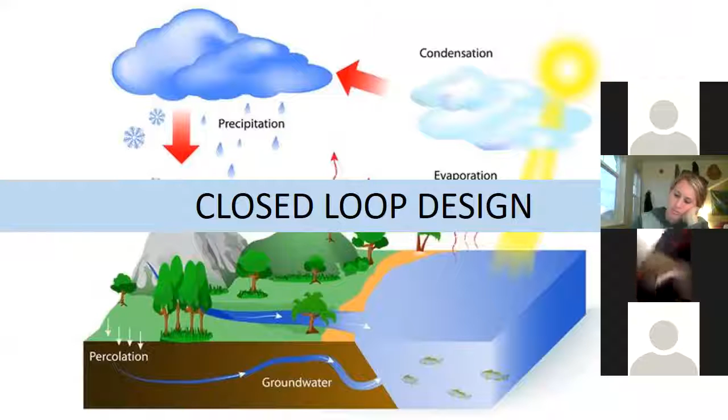Earthship has 6 main principles: build with natural and repurposed material, thermal solar heating and cooling, solar electricity, water harvesting, contained sewage treatment, and food production. I'm going to go through all of these so you can see how they come together, couching it within sustainable architecture principles to show how the Earthship is the epitome of sustainable architecture.

I'm also making the assumption that everybody knows what an Earthship is and who Mike Reynolds is, so I don't have to go into all that detail. I'm jumping right in. If you don't, definitely do some research right now as we're talking to connect yourself with it.

So the first principle: building with natural and repurposed materials. Repurposing materials is a really strong aspect of sustainable architecture. So we have this image of a quilt. Everybody's seen a quilt, right? The quilt is the perfect example of repurposing materials, because historically the quilt was a piece of jacket,

a piece of sweater, a shirt, elements that contained a memory, an element of your culture, your family. You cut those pieces out and put the quilt together, repurposing them because you weren't using them any longer, so you can now keep yourself warm, or from an architecture standpoint, put it over the windows to keep out drafts.

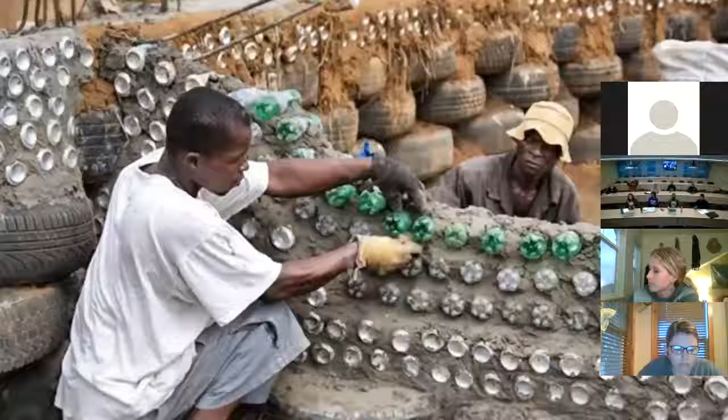And so it looks like this, where you have people that are packing bottles in between, and you have tires in the back that they pack with dirt in order to form the wall. And then you also are repurposing materials on the interior of the space. And so the repurposing of materials and using local materials, you have adobe wall floors, and the material within the doors will be repurposed wood, or depending on how that Earthship is being created, they may actually find an old door and repurpose it.

But the other thing that's really beautiful about this is, so you're getting repurposed glass all through here that's been cut and has been put into this wall to create something very similar to stained glass. It's just this old glass that's been repurposed and put into the wall, and the colors that are in the glass are now creating these really beautiful experiences inside that space.

So the next thing we'll look at is the thermal solar heating and cooling. And first thing we'll look at is the thermal mass. That's a passive system. There are passive systems and active systems. Passive systems within architecture are those systems that you don't have to do anything. It's going to operate, and you'll see what I mean by that. And then you have active systems. Those are mechanical systems. They're systems that you have to provide some sort of energy in order for it to operate and to do whatever its purpose is.

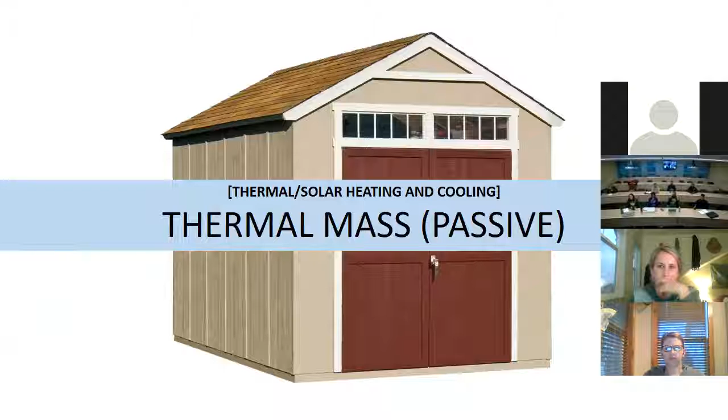And so thermal mass, I have an image of, what's this? Shed. It's a shed. This is a shed, it's storage. We store things in this. So what you want to think about when you think about thermal mass, it's a storage. It's an enclosure that's containing its mass, and it's containing the thermal properties. Sun is beating in there. So in essence, you're storing sun inside of a thermal mass. So why is that important?

So thermal mass is a wall, or it's an element that has thickness to it. And within a normal day, if you don't have a thermal mass, you're going to get a lot of fluctuations, peaks and valleys. As the temperature outside changes, the temperature inside your space is also going to go up and down as a result of the fact that you don't have a thermal mass.

Now you can insulate that wall as well, but the thermal mass also assists you with reducing the fluctuation of temperature. And that's what you see right here. Although there are peaks and valleys, they're nowhere near the peaks and valleys that you get here. It becomes a pretty consistent temperature throughout the day because of that thermal mass.

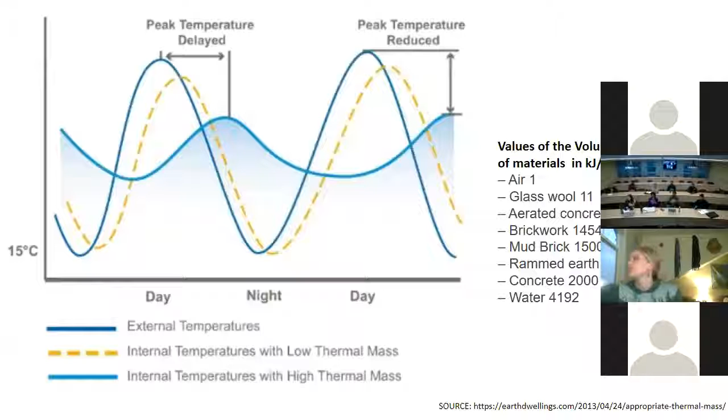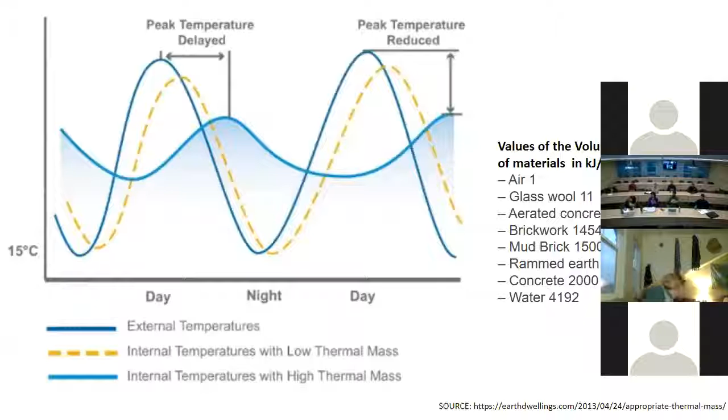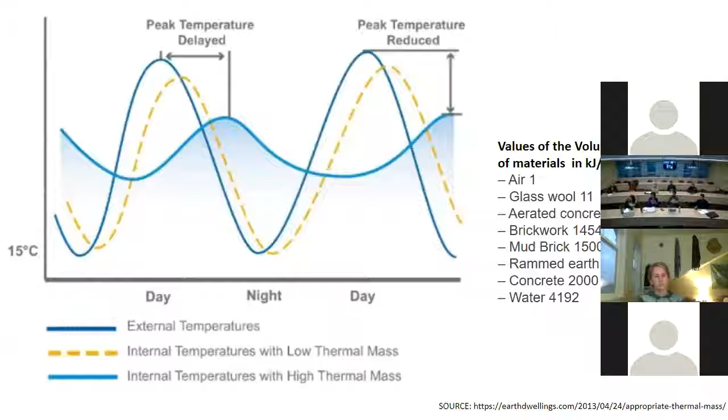So by having a thermal mass, you're able to contain a lot of heat within this enclosure. And the value of that is that as the temperature swings, that heat eventually is given off. So if the thermal mass had heat that was up to 80 degrees, then as the temperature drops below 80 degrees, that heat starts to dissipate and come on out because heat wants to go to the lowest temperature.

And this is what that thermal mass looks like. And so they take tires and they pound the tires and they fill them up with dirt, and that's how they begin to form the walls in order to create the earthship.

All right, so the next thing you want to look at, does anybody know what this is an image of? Sunbathing. Intelligence, I love it. So sunbathing. Trick question. I was gonna say Gidget.

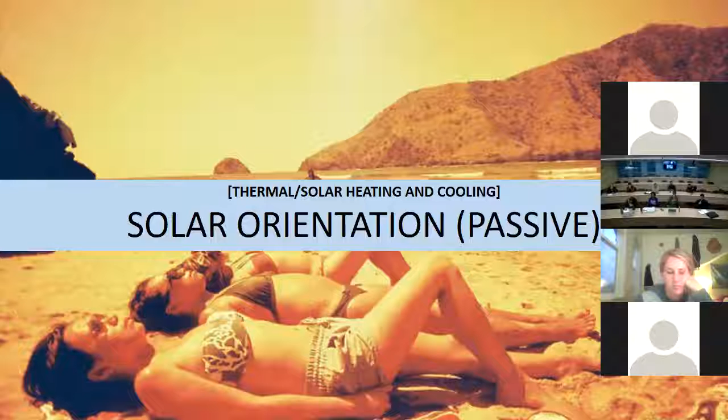So thermal solar heating and cooling. You know, when you sunbathe, you're not trying to get in the shade, are you? Hopefully not. You're not going to get a really good tan, right? So when you're sunbathing, you're looking for the optimal location in order to take advantage of all that radiation that's coming from the sun. Well, that's the same concept when you're dealing with solar orientation.

And so by having your southern orientation with a lot of windows, you're able to get all of that heat gain beaming into that space. And so if you have a thermal mass, I don't have it in this presentation, but it's called a Trombe wall, or if you have an earthen wall that also acts as a thermal mass, that sun will beam into the building and it will heat up that floor or heat up that Trombe wall, and it will allow that temperature to dissipate as the temperature starts to swing.

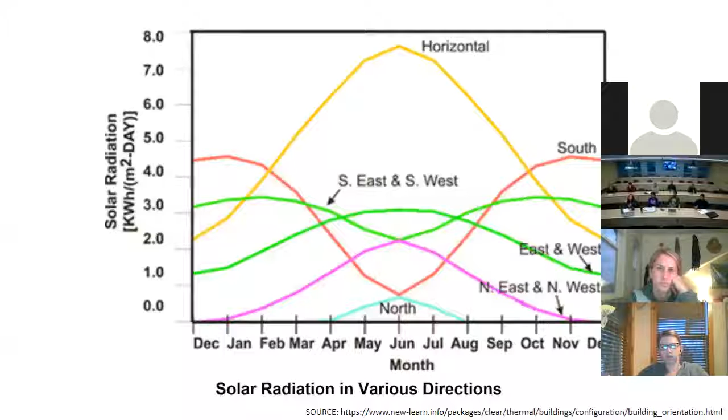And so just by orienting your windows, you can see if I orient my windows due south, I get a lot more solar radiation throughout the day than if I have them southeast, southwest, or within the north. North, you get no solar exposure. So there is no solar radiation. You're just getting ambient light that's coming in. It's actually heat lost rather than heat gain. Yes? Sorry, is horizontal like a skylight? It's just saying that it's flat. Oh.

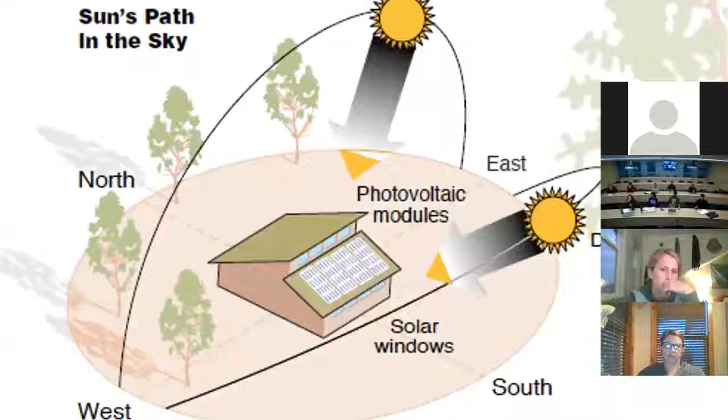The other active system that they have is a cooling system that I thought was really awesome. This was something I didn't see in the literature and in the things that I read about. So it was great when you go and they're like, if you want to keep it cool, open up the cooling tube. Oh man, this is great. Air conditioning, I don't have to plug in.

So they have a cooling tube right here that is the same concept, that if it's warm air out here, warm air and cool air, they want to replace each other. And so by opening it, you're able to get this transfer of cool air into the space to keep the space cool as the night goes on.

And you can see here, you have your summer sun that beats down inside the space. They have a greenhouse. We'll talk about that in a little while. And if this floor was an earthen floor, it would also heat up and it would work as that Trombe wall. So I have a question.

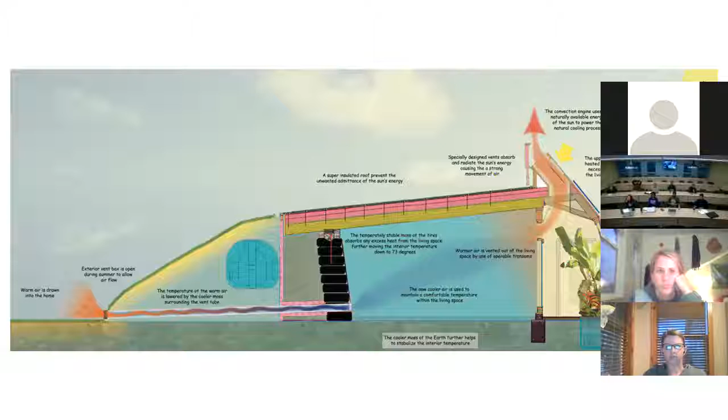That backside, are they built up that way? This here? Yeah, so you actually move the dirt into that mound? Yes. Okay, so it's not like built into a hillside. So this is actually dirt, and I'm gonna talk about this in a little while. It's an earthen berm, and they put this on the north side of the wall so that you're not getting any heat loss. Gotcha. So you have all this earth right here that's just preventing any kind of heat loss that would happen.

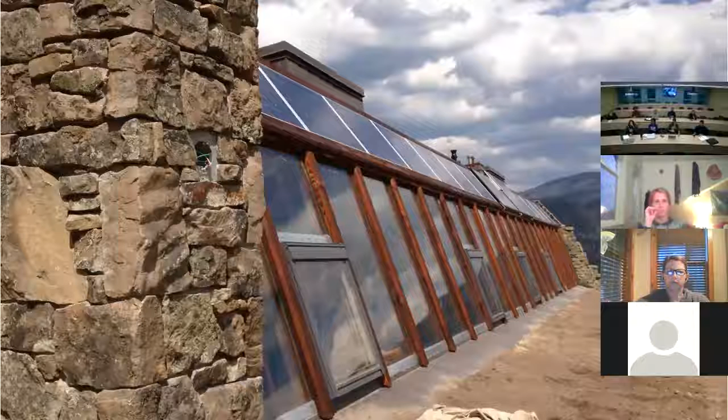And so this is the primary design that you'll see with all Earthships, if they're done the way they're supposed to be done: the southern exposure, that southern wall, you have all the glazing and you have your solar panels, and we'll talk about renewables in a little while. You have the southern exposure with all of the windows here, and so you're capturing all of that heat gain into that space. And I'll tell you in a little while why that's important, outside of the fact that you're able to capture all of that heat in order to keep the space up.

Not ready. So what's the first thing that we say? We look out the window, we see there's snow outside. What do we have to do? Layer up. I need to put a jacket on. I need to make sure that I am insulated, because if I don't, I have a couple of problems when I walk outside in that snow.

And so the way that you measure how well your insulation is, is based off of what's called R value. The R value is the measure of thermal resistance used in the building and construction industry, and it talks about how you're able to resist heat flow. It's measured by R8 to R32, and this is the amount of heat flow reduction. So an R8 wall will give you 90% heat reduction. An R32 will give you 97% reduction.

So simply, it just means that the higher the R value, the greater the heat reduction. The ability for heat to pass through is reduced the higher your R value is. And energy efficiency goes up as well, because if you're heating that space on the inside, you're not losing that heat due to transfer.

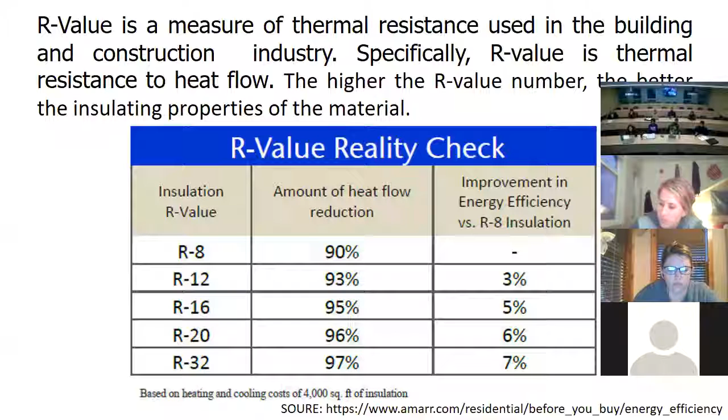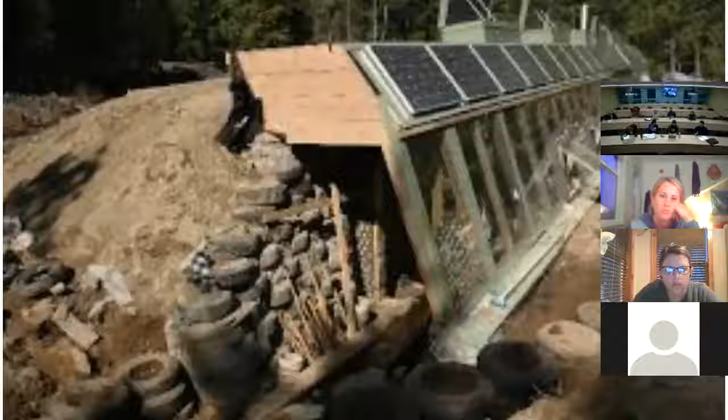And this is that earthen berm. So you were asking the question about the berm. As they build the wall up, they pile the dirt on the backside. So keep building, and then the dirt is built on top of that, and it seals off to prevent the heat loss on that north side, because again, no sun is going to be on the north side. This is actually the front of the house, and it's that much buried. Everything behind that is buried. Yes. So this is the front of the house, and everything else is on the back side.

It also depends on the design of the Earthship, but this is the basic organizing principle: the south side of it will be full glass exposure to the southern sun. Then you're entering from the east and west, and then on the north side, you're going to have an earthen berm in order to resist heat loss.

All right. So the other principle is solar and wind electricity. Wind is not in every single one. Solar is the primary one that you'll find with Earthships. But renewable energy is an active system. It's an active system because it's a mechanically operating system. You have to have inverters. You have to have things in place in order to make it operate.

So it's a little bit different than passive systems, because with passive systems you don't have to do anything. It's going to operate. You're just getting yourself aligned with it. Whereas an active system, you have to put it in place. And so why is renewable energy important? Or is it? Because we're past peak oil. Fossil fuels become a problem.

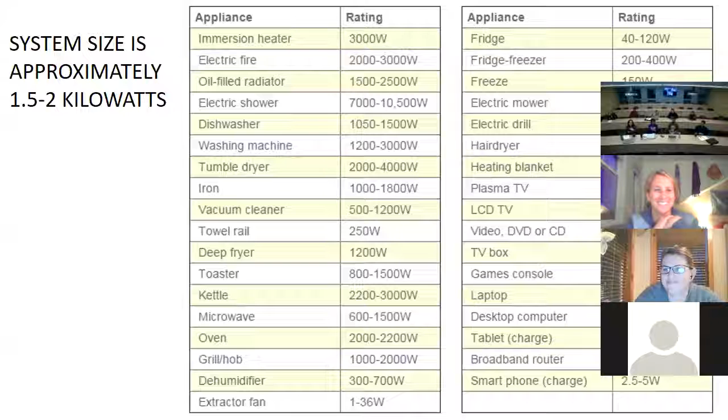You got something on the screen. Oh. You have a comment on the screen? No, I didn't say anything. Is somebody tracking comments, by the way? Yeah.

All right. So let's say while you're doing that, you get a call from your friend. Hey, let's go out, have some fun downtown. So you say I have to iron my clothes because they're wrinkled. So I pull out my iron, and I'm at 1,800 watts maximum, and I forgot to turn off my CD player and my laptop. So I'm getting up to the 1.5 to 2 kilowatts. And if they might come by my house afterwards, let me vacuum. Oh man, I just pushed us over. So we've just shut down our system.

So that's what's really powerful about it. The experience I had being in there is that you become very conscious of the system you're using. You're not just saying electricity is going to be here and I'm just going to flick a light switch on or plug in, which we love to do. You become conscious of your water usage and your electrical usage to make sure you don't exhaust it.

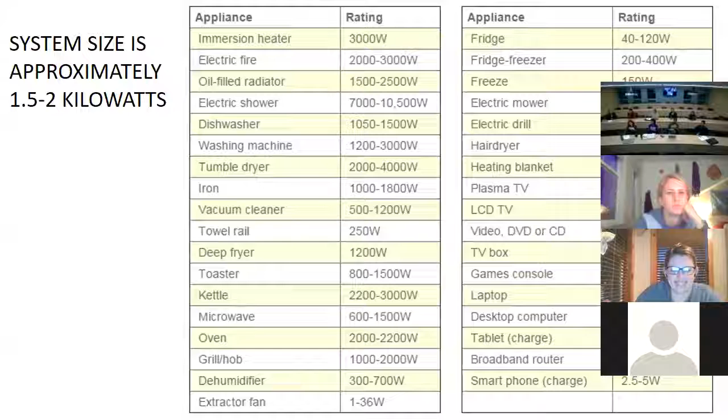It's like the Earthship office we visited. Exactly. They had 3 days of clouds and the Earthship office was running off a generator. The office has to stay operational. The guests, we got treated like royalty. Oh yeah, we did. But the office, they're ironing like crazy, like can we exhaust this system?

And so you see solar as one of the alternative energy sources, and you also have wind. And this was a wind turbine that Mike Reynolds designed. And so wind and solar come together in order to produce the energy that you're going to need generated, and then it's used within the space, that building on the last where we gave our talk. Yes.

And so the array of solar cells that you have dictates how much energy you're going to be able to generate in order to operate as many appliances as efficient. Energy efficiency is something that's also extremely important. So as we talked about the thermal value of that space, by increasing your energy efficiency within the building, you also decrease the amount of renewable energy that you're going to need.

So that's always the very first thing that you do when it comes to sustainable architecture, is that you figure out how to make my building as energy efficient as possible. Because logic just then says that I don't have to use as much renewable energy in order to do that.

So how many of us remember standing outside as a kid, drinking that rain until our parents told us it was polluted, and then they tell us how they used to do it when they were kids. So rainwater capture. Rainwater capture is one of the other aspects. So water harvesting is another component that you find within the Earthship. Let's look at how much water do we use as a body of people.

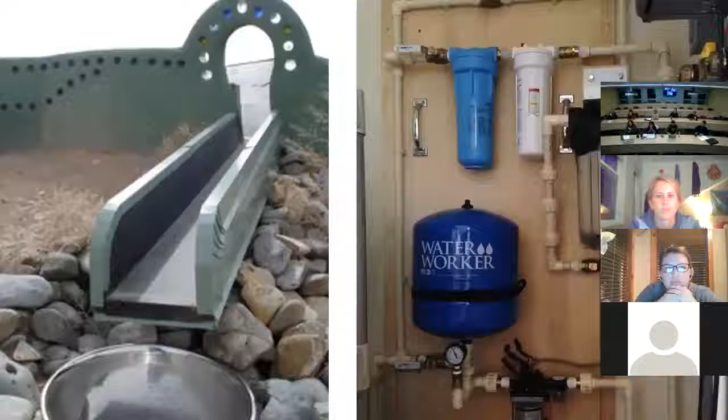That's a luxury. So how does the Earthship operate? Earthship has a system of rainwater catchment systems that are integrated within the building. So rainwater will fall off of the roof and it will flow into whatever system they set up in order for that water to go into a cistern. And then it goes into the building.

This is to maintain the pressure of the water. It goes into a filter. And then it goes into another filter. Then it goes into another filter, and then it becomes drinkable. And that's your gray water. So you have two different types of water. You have gray water and you have black water.

Anybody know what gray water is? Everything except for your toilet and maybe your sink. Yes. Depending on what you're pouring in. If you're pouring anything organic in your sink, and if you've ever had to clean out a sink to rescue a wedding ring, then you will have experienced what gray water can look like, especially if it's a kitchen sink.

Black water. So black water is anything where water is mixing with organic matter. So that's why the toilets are considered black water, and a kitchen sink is generally considered black water. So what the Earthship does is it recycles rainwater, which is considered gray water, and it filters it, and it makes that drinkable. And it also takes that water and allows you to flush your toilets with it.

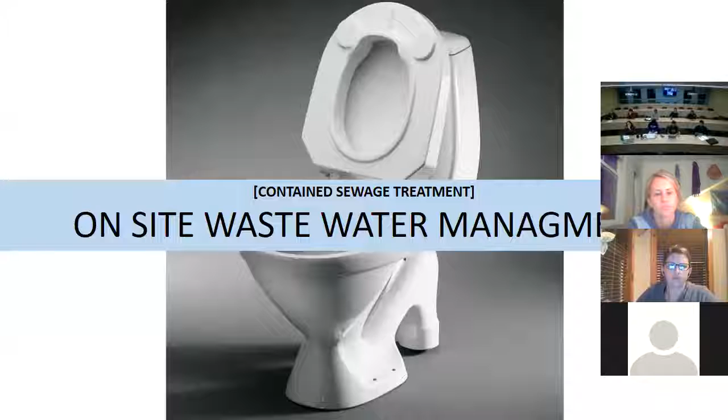So contained sewage treatment. This is another component. So they deal with on-site waste. They have an on-site wastewater management system. This is really, really awesome. It's an issue that we're dealing with right now in Alabama, that we're looking to tackle. When we look at the percentage of the population with access to sanitation services, anybody here ever think about where they're going to use the bathroom?

Most people are like, oh, I'm just going to go to the bathroom, right? Something we take for granted. There are many places that don't take it for granted. It's kind of tough. You still got to go when you got to go, but clean sanitation is a problem for some places. In North America, 77.9% of the people have safely managed waste management systems. But if we go down to sub-Saharan Africa, Latin America and the Caribbean, Western Asia and Northern Africa, around 32.8% are safely managed.

Then you're looking at basic, and then you have a good percentage that have limited, unimproved, and then open defecation. And so why is open defecation a problem? In Alabama, so Tuskegee University is in Alabama. The UN came down in December and toured America to look at poverty in America. They toured Lowndes County. Lowndes County is approximately two hours from our university, and they're suffering from issues dealing with hookworm.

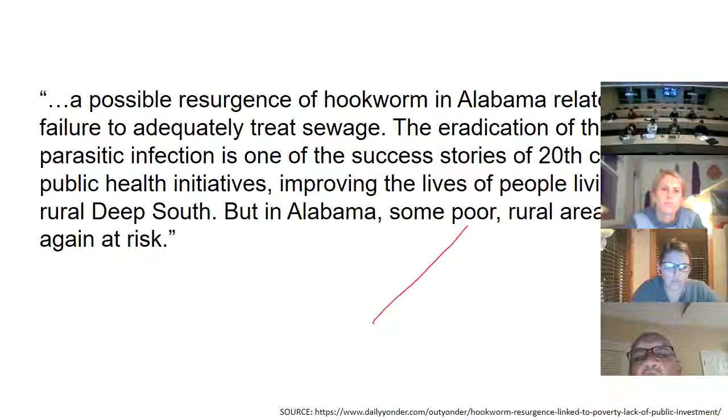And it's the desert, so it's not a lot of water. And we need water to survive, right? And so we realize that these are things that need to happen. And so the thing that's valuable about that is that him dealing with the wastewater is something that in Alabama, although we don't have the same conditions, we have issues with wastewater because we have a lot of people that are living without an infrastructure. And there are a lot of people around the world who are dealing with the exact same issue.

So one of the other things about it is, let's see, we're here in New Mexico, right? Right. All right. And New Mexico, it's up around 18% or more. They're in poverty. And it's more rural than the US average. So you're talking about basically an entire state that's very rural and it's very poor. And if we jump over to Alabama, we're dealing with similar conditions, similar economic conditions. So we're realizing that there's a socioeconomic issue associated with this.

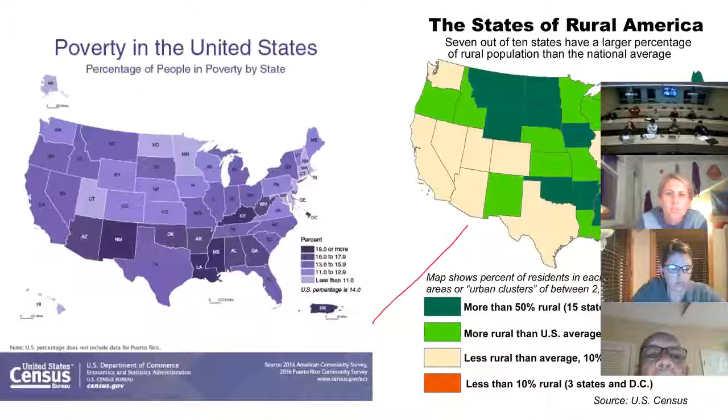And so when you're coming up with this solution, it's really powerful because it's like, yeah, it was just done here in New Mexico, but he's been able to take it around the world to different places, because being in a rural area means you're separated from infrastructure. Dealing with a poverty issue means that even though I might have the infrastructure, I may not be able to pay for it, which is some of the things we're seeing. It's like, pipes run from the municipal services center to houses, but you know what? I'm a little bit further than their reach, and so I don't get access to that because I can't afford it. And so the solution that he developed is great because this is the challenge.

And sanitary systems is not something new. It's been around for a very long time. And despite how kind of graphic it is, it really explains what goes on. If I need to go to the bathroom, like right now I can say, excuse me, I'll be back, I need to go to the bathroom. I'm just asking you, where is it? But if I don't have that infrastructure in place, I'm gonna go to whatever place is private. And generally the private is not the space that I think is gonna be the cleanest. And so within that area, poor sanitation breeds disease. It's something we already know.

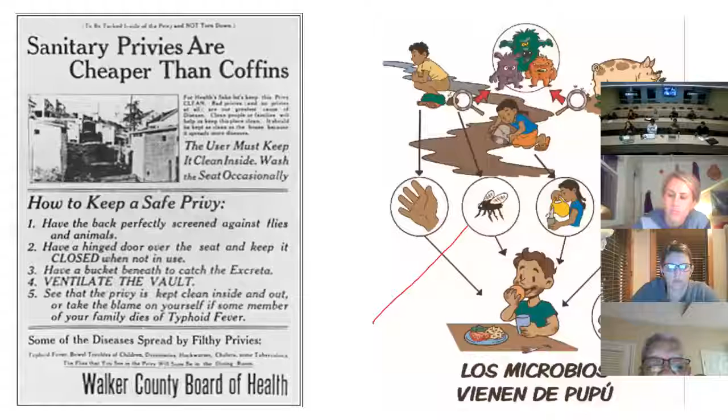But if I'm poor and I'm living in a rural area, although I may know it, I may not be able to do anything about it. Because all of us smart people in the room may not have come up with that solution. So as you can see here, that then gets into your food system, it gets into your water supply, insects engage with it, and you're touching it, and all of that is making you sick. And these are the issues that we're seeing in parts of Alabama. And I know for sure these are some of the issues that are here in Colorado or New Mexico and any other rural area, poor area. We just haven't got somebody out there to research it. But better yet, that's what y'all do.

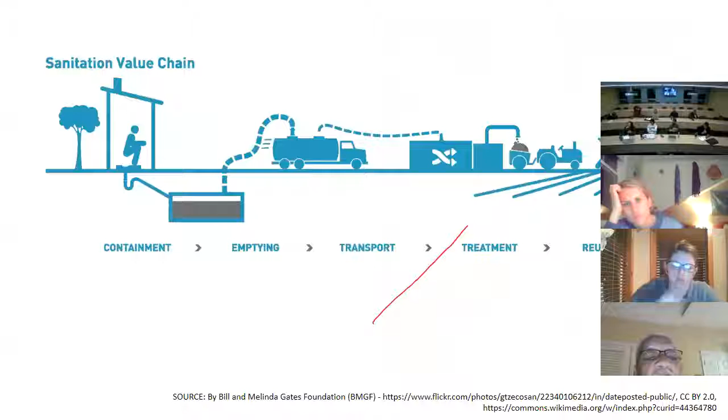And so if we think about the normal methodology for sanitation, what you do is you go to the bathroom, it gets contained, it gets pumped out if you have a septic system, emptied, transported, and it gets treated. And we get this nice thing called compost. So we can compost it and we can use it in order to grow vegetables. And that's what's really awesome about it, is because he's doing the exact same thing with his system.

So we talked about gray water and what? Black water. And black water. So we have our gray water, which comes out of our sink. And then that gray water will go into a filter system, and then it will go inside, and we're going to talk about what happens when it goes inside in a little while. But then we have our black water. That's coming out of our toilet. So the black water will come here, and it will go into an underground tank where it will be treated. And then once it's been treated, it will be pumped out into non-edible plants.

And so you have a decentralized system that for a person who's living in a poor area or a rural area that doesn't have access to the infrastructure, they're able to address that issue on site. And that's probably one of the most powerful pieces about this, is we all have waste, we have to get rid of it. And if I'm in a place where I don't have an infrastructure to deal with it, then I get disease.

Do they also have composting toilets there? Because I feel like in the desert, even that little amount of water to flush the toilet, it's valuable. I didn't see composting toilets. There is one Earthship I visited about 10 years ago that had a human manure system. And they were so confident in their ability to sanitize their manure through composting that they're spreading it on their vegetables. Yep, I've seen that too.

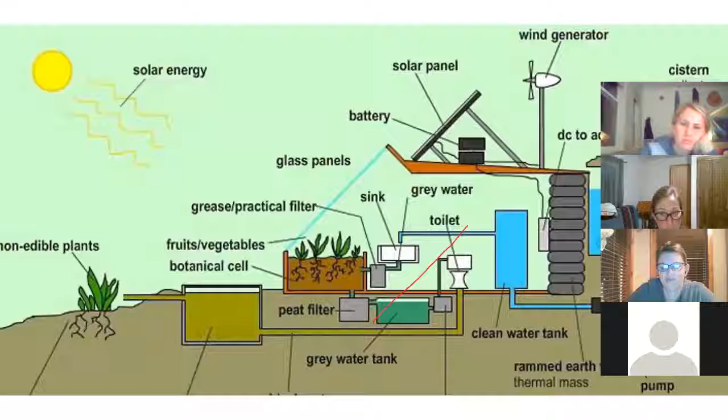You get it. Okay? So if you give me a system that operates just like I operate every single day, I go around the corner, I heard that there's these newfangled things called toilets that you press down a button and water comes down and pushes it out. Oh, I want those newfangled things too. So that means that we need to create systems that allow it to operate the way it's supposed to operate. And that's what's really powerful about what he's created: it's the same kind of system, however, it's just a decentralized system.

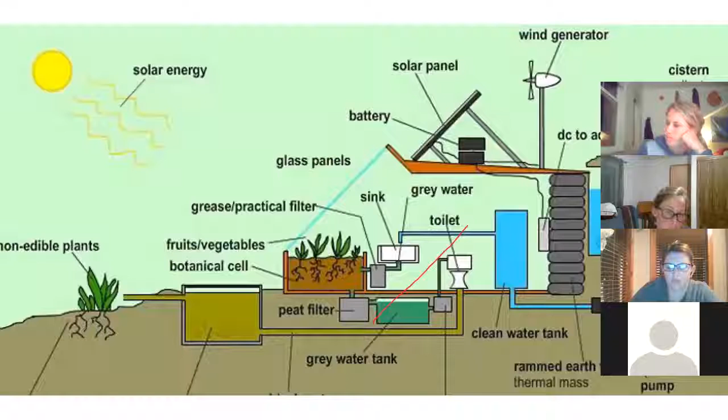And that waste, the gray water that we talked about before, flows into this space here. When you walk inside of it, from the southern side, between this space and this wall here, where your living quarters are, you have a greenhouse. And so all your gray water is flowing there in order to be treated. It's being dealt with by plants, so it's being dealt with biologically. Do you have to plant any specific kinds of plants there to manage different types of nutrients.

He has bananas growing. He has a tropical rainforest in the middle of the desert. So I can't speak to the selection, but I know I wouldn't have thought, let me plant a banana tree. I'm not sure if he's talked a lot about that selection. There were very similar species of plants from greenhouse to greenhouse, but there were some like the Phoenix where there was no holds barred. But that also takes a team of botanists basically to come in there and manage it, plant, and monitor it over time. And the condensation is crazy.

Yes. So in a lot of these greenhouses, they'll design for a climate that you're trying to achieve. So if you're in USDA zone 3 or 4, like we are, you can step it up to USDA zone 10, which is like southern Florida. And then you'd be choosing those plants based on the lowest temperature.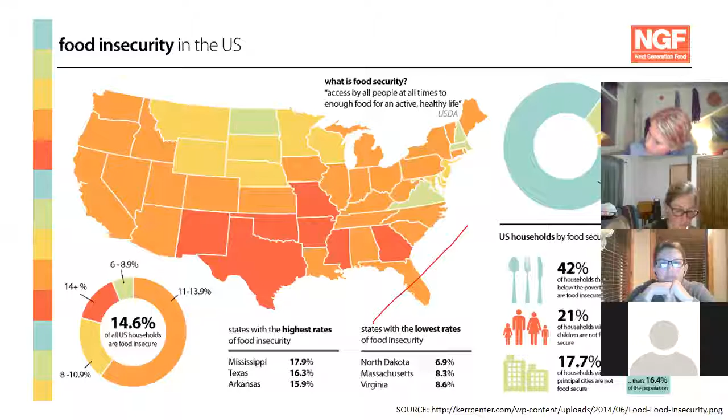And so without digging in, that would be one of the rationales I'd say for why you would have something like that. And then the prevalence of food insecurity between 2015 and 2017. Again, New Mexico is bright red, and on this map, Alabama is bright red. So developing a solution that's local, but it's also continental, and then it becomes global.

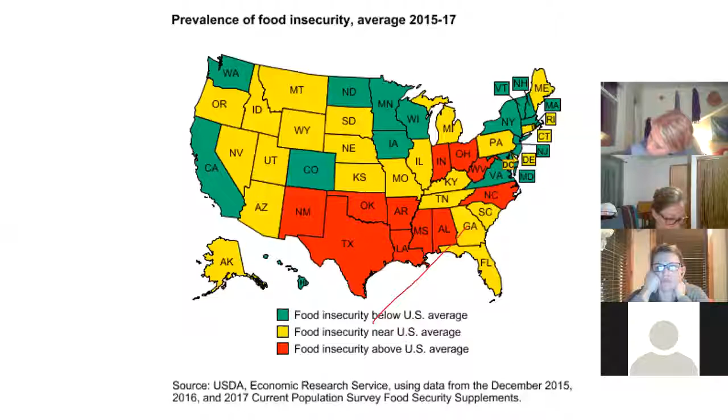I didn't hit the global just because that's a conversation we already know about. We don't really have this conversation. We make assumptions, because we live in a developed nation, that everybody is developed. And so being in that space, like I mentioned, you have oranges growing, you have bananas growing, you have so much vegetation growing, and it's just there, it's in your face. It's an amazing thing to be in the middle of the desert at the same time.

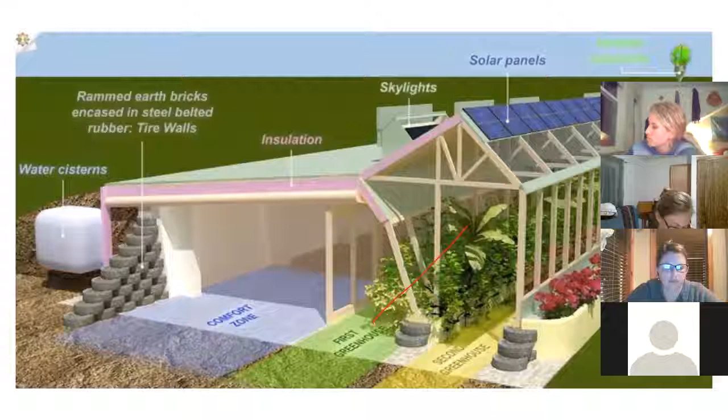And so this is a diagram that shows how this whole thing works together. So we talked about the southern exposure, right? The southern exposure ensures that you're getting a heat gain. That heat gain is passing into the first greenhouse and the second greenhouse in order to grow food within the space. And then you're getting the comfort zone. These are living quarters, the living room and the bedrooms along this axis. And then you have the rammed earth tires that are also preventing the heat loss.

Along with that, you have your water cistern on this side that's capturing all of the rainwater that's flowing off of the roof, and you have your earthen berm that's encasing all of that and keeping down the heat loss. And so, in summation, when we're looking at sustainable architecture, in this case, I use the Earthships.

Did I get it right? What's that? The Earthships? Yeah. I got it right? Yeah, you did great, man. Perfect. You're a resident expert. All right, cool. I got a hand clap.

So I had the conversation about the Earthships because I figured this is something that's closest to you, and if you haven't been out there, I promise you should go out there and check it out. It's just the coolest thing on the planet. I know it's not for everybody, but I think it's for everybody to see it, because it really starts to challenge your mind about what's possible in how you live.

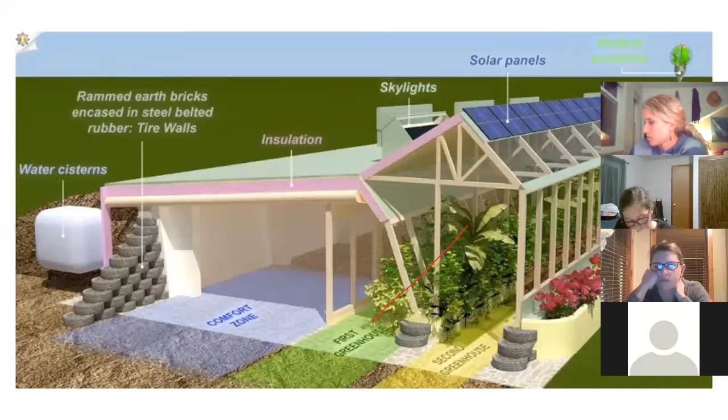About a year later, he purchased an old plantation. There were 3 houses on that plantation, and they were in disrepair. That's what started our building process. And so he said, I had to fix this up. We had students that came down that had frostbite and rain. I mean, you think about the power of education. They tell stories of how students would hold an umbrella over his head so he could continue to give the recitation because they so valued the fact that he was bringing education to them.

So we're talking about a population that is 20 to 30 years out of slavery. And so you have a population that's already been socialized to not be educated, and now they're getting education, and that's gold to them. So a little rain, a little frostbite means nothing. But realizing that I need to provide housing, I need to provide space, tell our students, you can't complain. We'll give you a shovel until you build your building. So get your book and do your studying.

So we have a history of brick making. So we have an area called the Valley. It's where we dug up all the dirt, and we used that dirt and turned it into bricks. And we took those bricks and we built the buildings. And the faculty, we had many of the first African Americans to be in particular industries. So Robert R. Taylor, who our school is named after, there's an RR in front of the T. So Robert R. Taylor, he was the first African American graduate of MIT. He was also the first formally trained architect in the country.

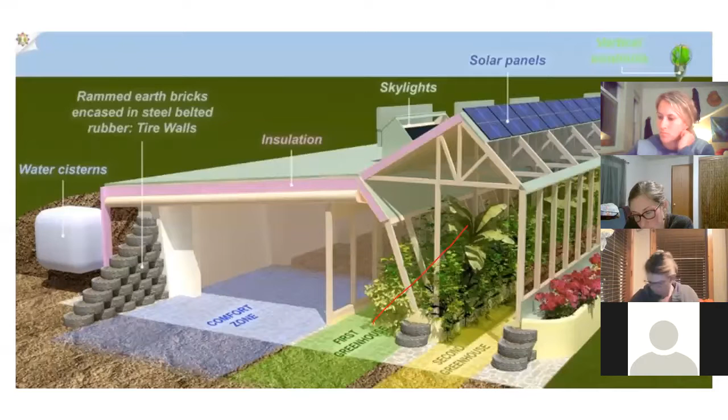We haven't explored what it looks like to do it yet, to run head-to-head with any challenges that may be out there. But we have land, and we do have the opportunity to say it's all research. So we can build. Building codes are there to protect the health, safety, and welfare of the public. As a resident, you can do whatever you want to do with your own house. So if you're creating a house, if we're creating a space,

housing is a major issue in Tuskegee right now. So to do it, you just got to say you want to do it, and then you go through the steps to make it happen. Building codes still play a role, but there's a way to get around that. The other piece is that because of this history, it already opens a door to a conversation.

So when Booker T. Washington was doing his work, his philosophy was learning to do by doing. You educate the head and the heart simultaneously. His belief was that every discipline that was going to be taught on campus was done out of natural order. So I don't teach you Latin. This is his words. I don't teach you Latin because the population I'm dealing with, Latin is not going to give them a return on the investment. I'm dealing with farmers. Latin is not going to teach them how to grow more food. So I'm not going to teach you Latin.

I'm going to teach you agriculture, and I'm not going to teach you in a book when I can take you outside and teach you the exact same thing right there. I'm not going to tell you about a fish in a book, I can tell you about a fish by going out there. So if you think about this conversation, his way we'd have this conversation is we'd be outside in Taos talking about Architecture 101 and sustainability, looking at the Earthship, talking about all the systems and how they operate. And so what he was doing then was considered monumental, and it's still considered monumental because we don't have a learning to do pedagogy with the way that we teach.